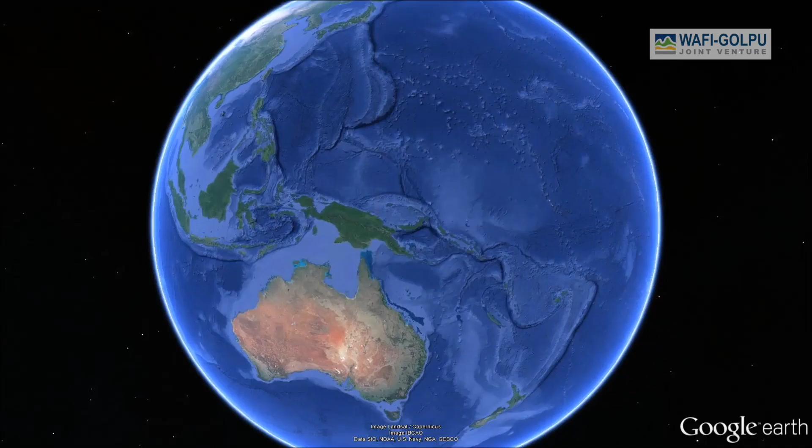The Wafi-Golpu Joint Venture, WGJV, an unincorporated 50-50 joint venture of subsidiaries of Newmont Corporation and Harmony Gold Mining Company Limited, is looking to progress the Wafi-Golpu project, the proposed development of a world-class underground copper gold mine in the Morobe province of Papua New Guinea. This fly-through shows the proposed mine and related facilities comprising the project.

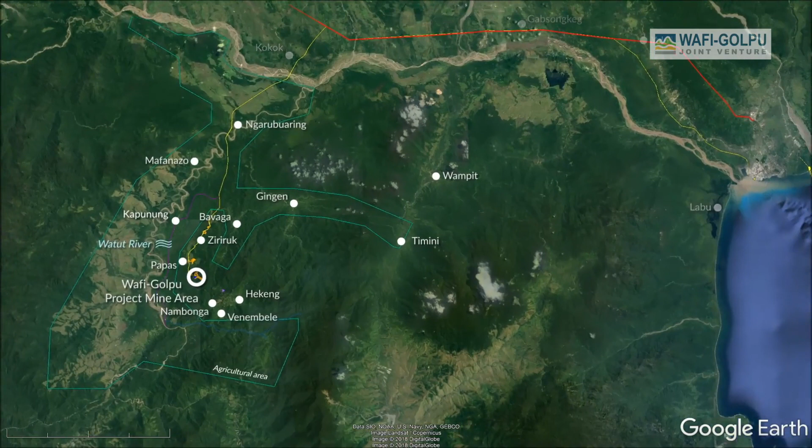The mine area is located approximately 65 kilometres southwest of the city of Lae, on the northern side of the Owen Stanley Ranges. The project footprint will extend from the mine area around Mount Golpu to the coastal area in Lae Port and Wagang, with an infrastructure corridor linking the two areas following the Watut and Markham valleys. The mine area, which is the subject of a special mining lease and ancillary tenement applications, will host underground access, ore processing, power generation, accommodation, and other ancillary facilities.

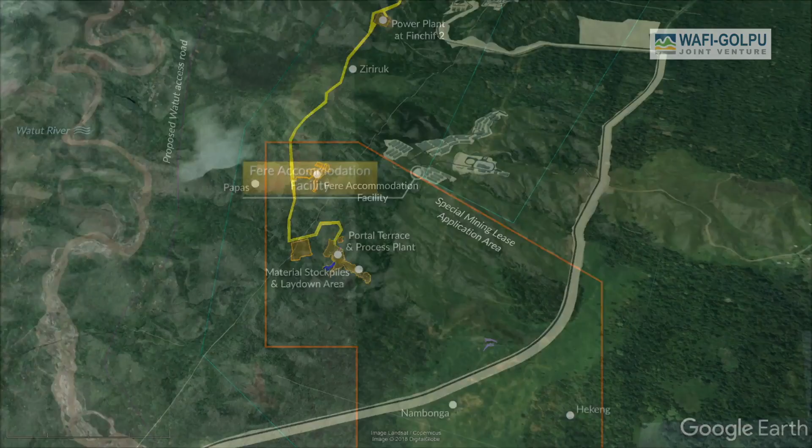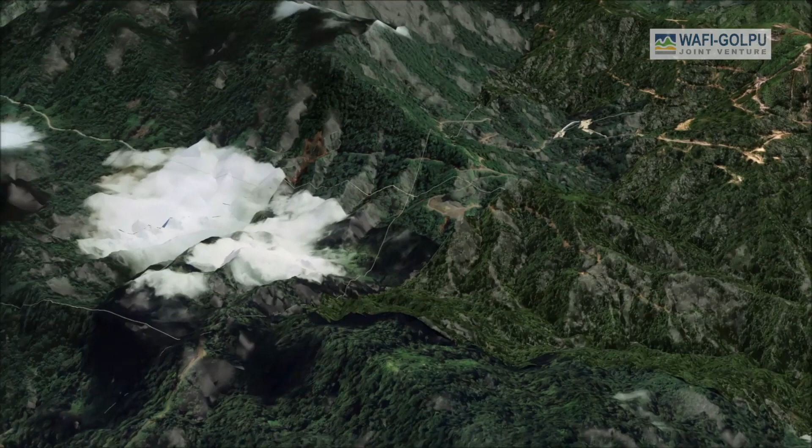Due to the mountainous terrain, some of these facilities, like the construction accommodation area, a potential power station and the laydown area, will be located in the lower Watut Valley. Other facilities must, by their nature, be located near to the ore body: the main underground mine access at the Watut Portal. The process plant and the Fere camp will all be located on the escarpment above the lower Watut Valley, at an elevation of 200 metres.

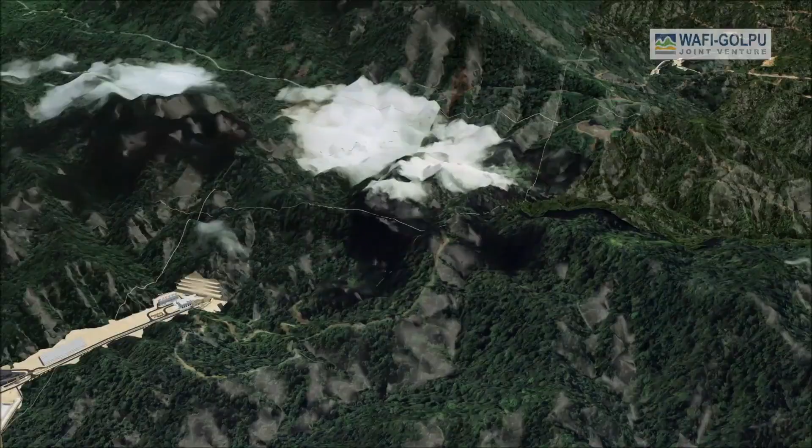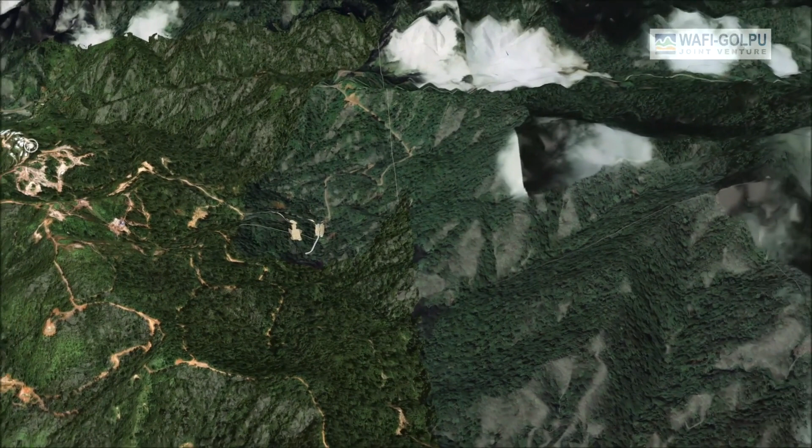A secondary underground access point, the Nambonga Decline, will be located closer to Mount Golpu. This access point will also serve as an important part of the mine ventilation system and will provide initial exploration access to establish an underground drilling platform to support further advanced geological and geotechnical data collection. It is proposed to utilise a mining method known as block cave mining. The main environmental benefit of this type of underground mining is a reduced environmental footprint compared to open-cut mining.

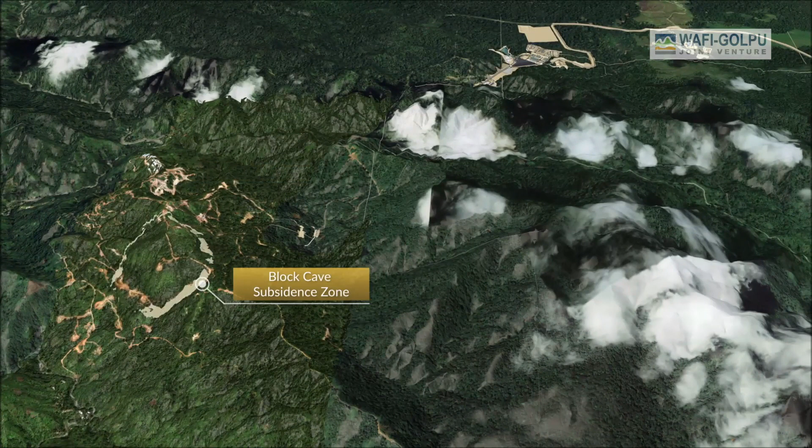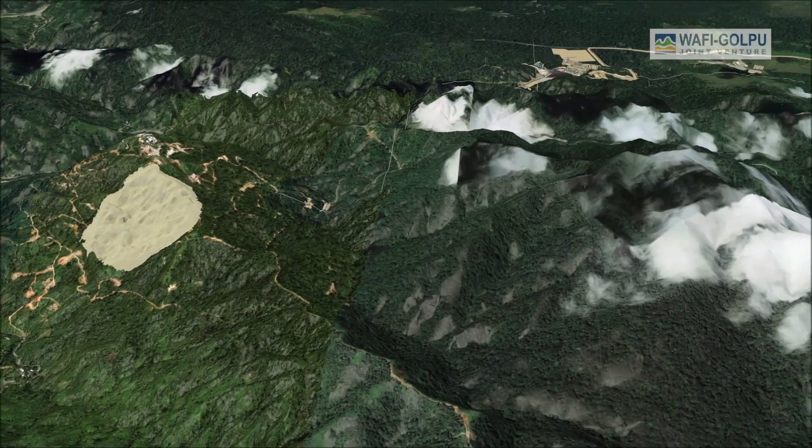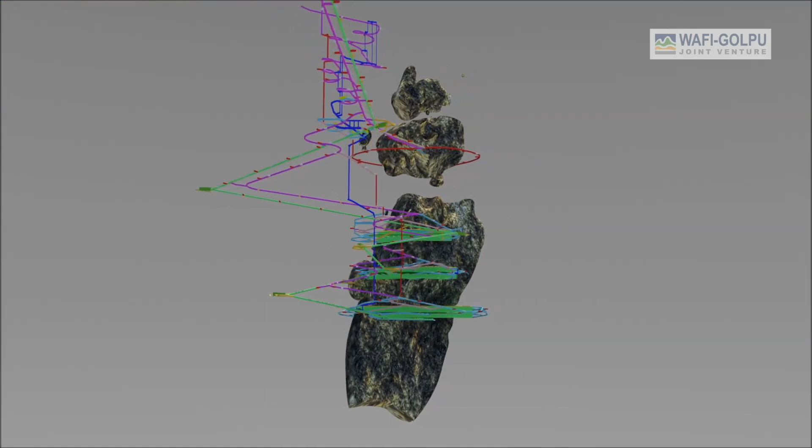The underground block cave mine lies below Mount Golpu, and a subsidence zone will develop as mining progresses and will break through to the surface about 3 years after ore production starts. The subsidence zone will expand gradually over the life of the mine to an estimated diameter of 1,000 metres. The Golpu copper-gold ore body is the dark near-vertical column-like mass that starts 200 metres below the surface and extends to depths of over 2,000 metres. The ore body is about 400 metres wide and well suited to the block cave mining technique. Offsets in the vertical profile of the ore body are caused by faulting.

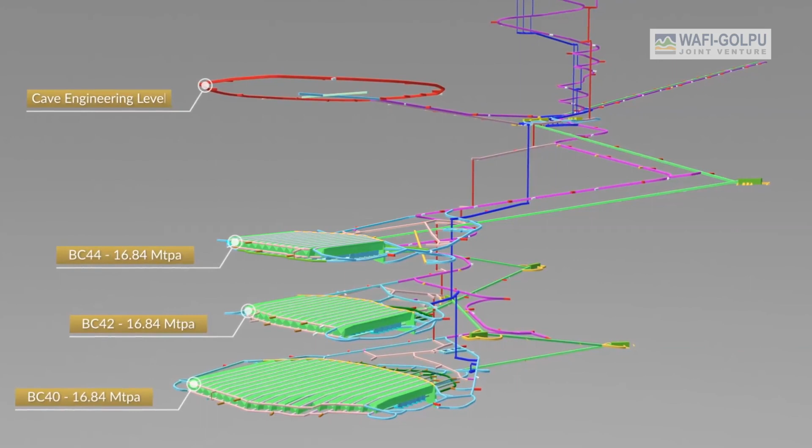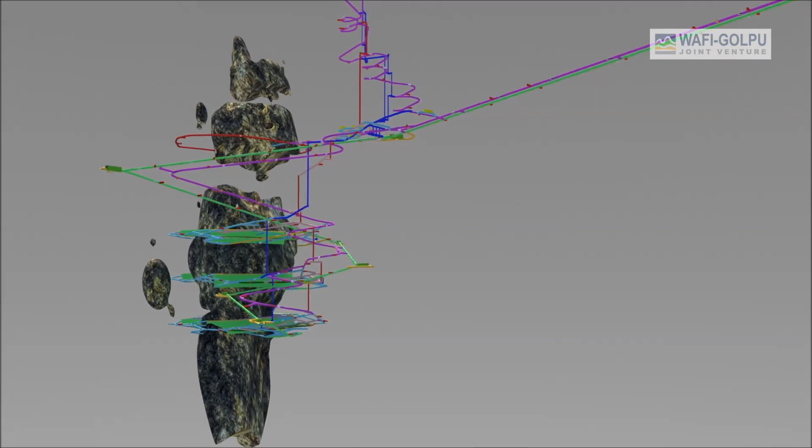The main access to the ore body will be via the Watut Decline, comprising twin tunnels, that extends 4.6 kilometres to reach the bottom of the first caving level, BC 44. As decline development or tunnelling advances only a few metres per day, it will still take 5 years before the first ore is produced. Over the life of the project, more than 100 kilometres of tunnels will be developed, which will make the proposed mine the largest underground mine in PNG and on a world-class scale. The secondary access, Nambonga Decline, is shown as a spiral formation.

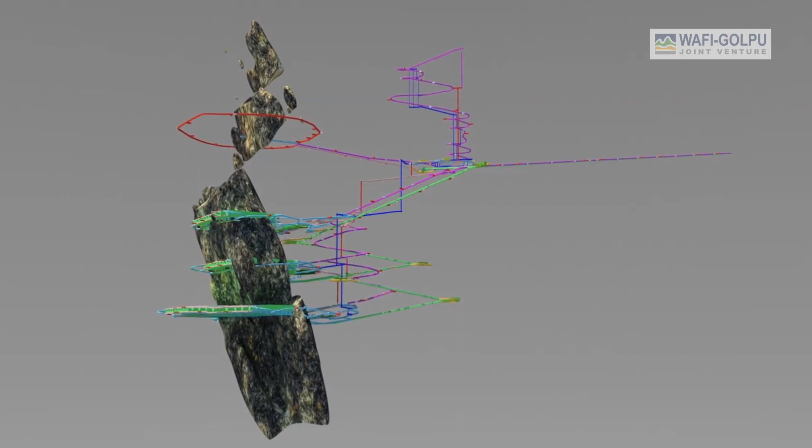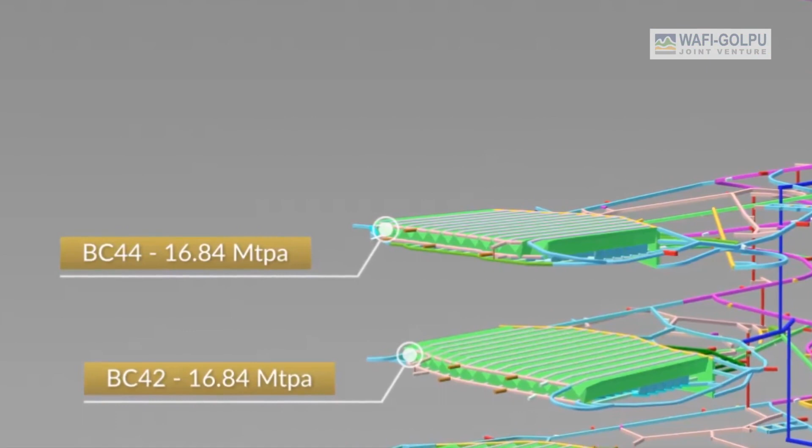The red ring above the main ore body is the cave engineering level that will be used to monitor the growth of the caved broken rock column. This will also be an important interception point for removal of underground water, a process called dewatering. Below this lie the 3 extraction levels, which are shown as solid green discs. The uppermost of these is called BC 44, which lies some 1.3 kilometres below the surface of Mount Golpu. This will be the first block cave mined, peaking at some 16.8 million tonnes per year and having a production life of some 7 years. Below this are 2 further block cave levels, called BC 42 and BC 40, each 200 metres apart. The period of mine production from all 3 block caves is estimated to be some 28 years.

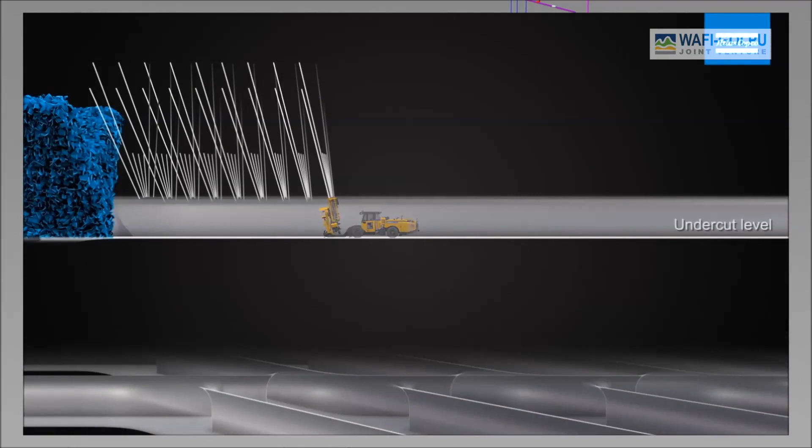We now look at how block caving works. The method involves the undermining of the ore body to make it collapse under its own weight, forming table-sized boulders. The rock is directed into a series of funnel-shaped excavations to enable extraction. Drilling and blasting is used to undermine the ore body to form what is called the undercut level. This is then connected to an extraction level via a series of funnel-shaped drawbells. The extraction level is strengthened by steel and concrete reinforcing.

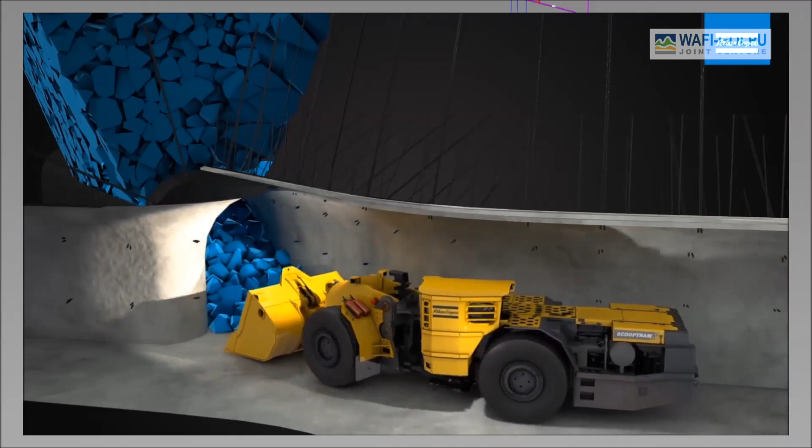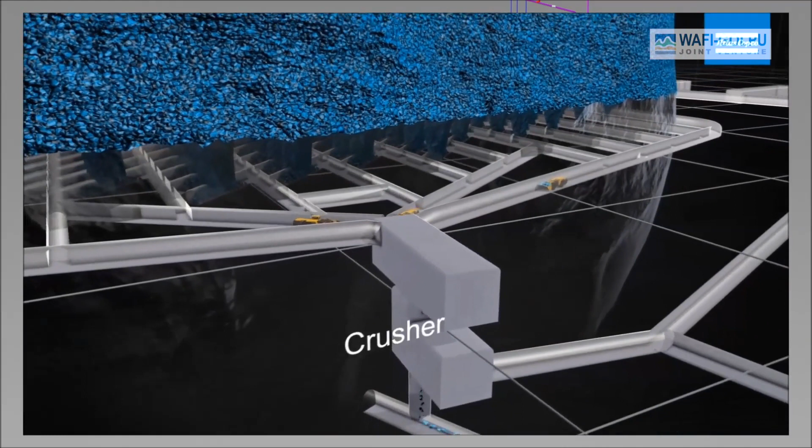Loaders, called LHDs, which stands for load haul dump, recover the broken ore, and take this to centralised underground crushers that reduce the rocks to a more manageable football size, suitable for transport to the surface. This transport is via a series of conveyor belts, which is shown as the green zigzag line extending from each of the levels. The conveyor goes through a series of transfer stations before travelling up the Watut decline to take the crushed rock to the surface, exiting at the portal.

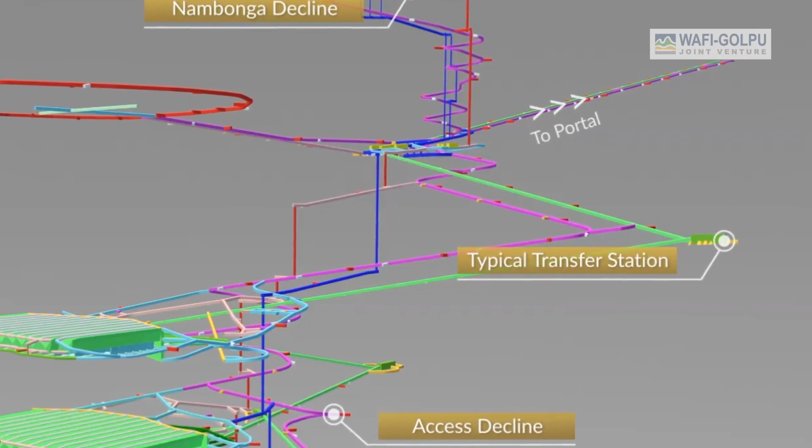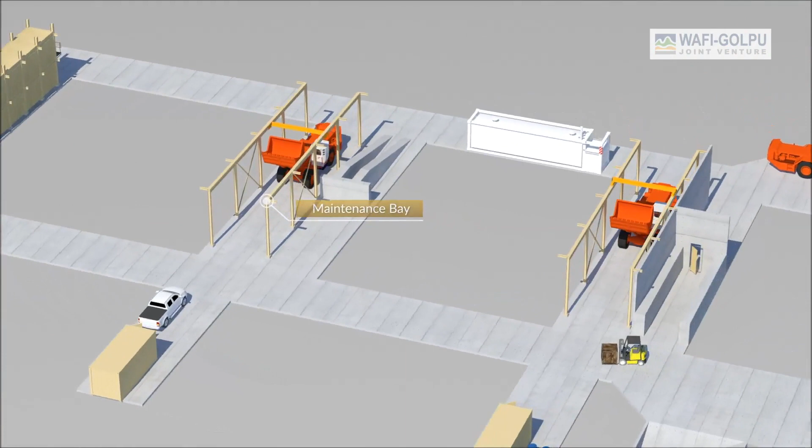The underground activities are fully supported by underground infrastructure, like the workshop, which allows all equipment to be cared for and maintained underground. That means that the mining fleet does not have to travel up and down to the surface every day. The crusher chamber contains a gyratory crusher, which crushes the rock between a gyrating steel core and the wall of the crusher.

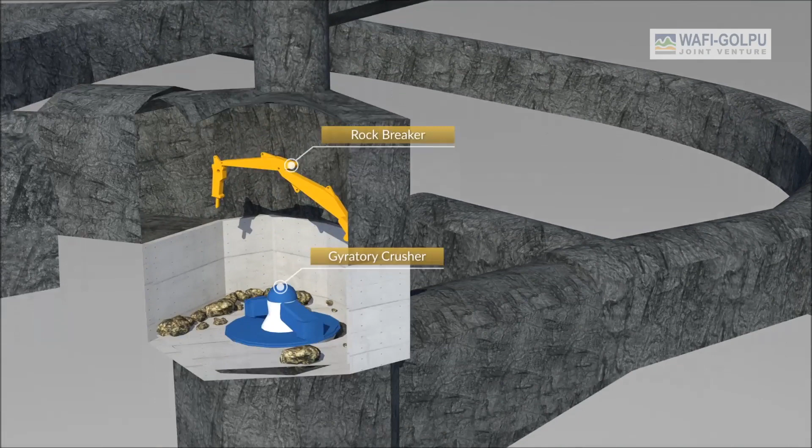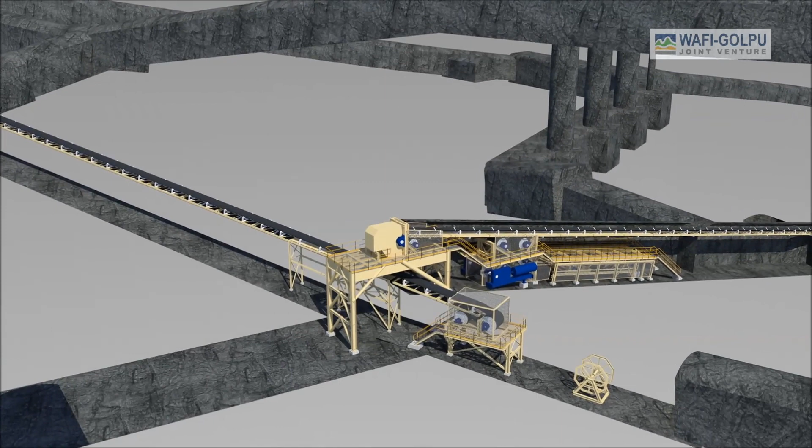The crushed rock collects at the bottom in the crushed ore bin, and then it is fed onto the conveyor belt. We now zoom in on the conveyor transfer station, which enables the change in direction for the conveyors at each level. Crushed ore on one conveyor drops down onto the one below via a chute, and then continues up the receiving conveyor.

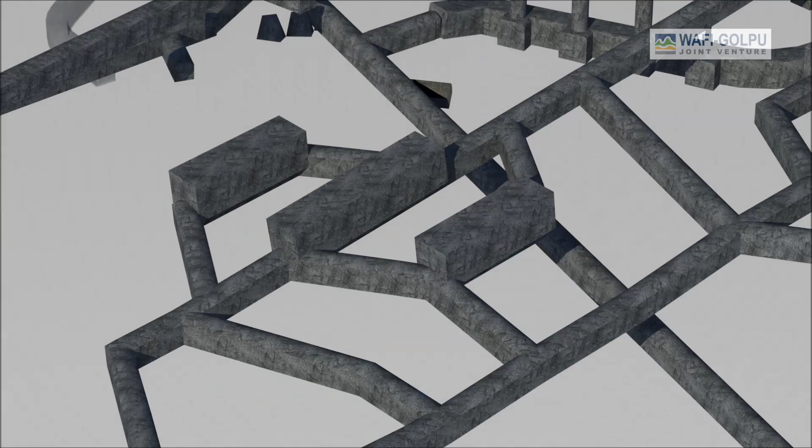Two other very important underground systems are the water pumping and cooling and ventilation systems that enable people to work safely deep underground, where it can be both hot and wet. These systems must operate 24 hours a day, 7 days a week, requiring a 99% reliable power supply to keep running and ensure a safe working environment.

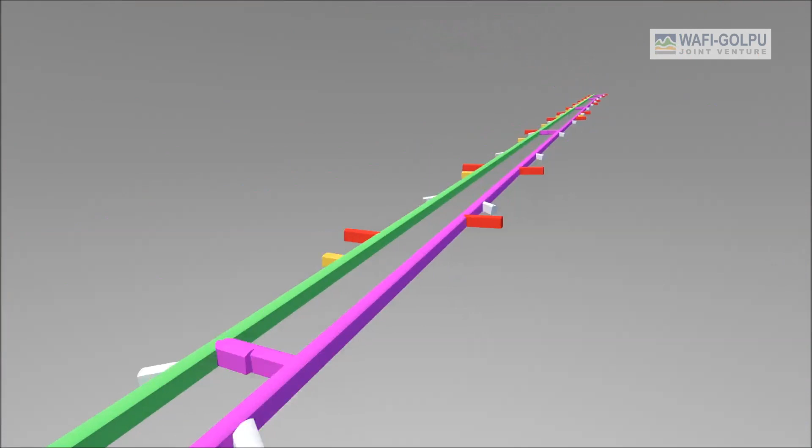Following the conveyors back up the Watut decline to the surface portal area, we see more of the critical underground ventilation system infrastructure, namely bulk air coolers, cooling towers, extraction fans, and refrigeration machines. The conveyor delivers the crushed ore to the cone-shaped pile called the coarse ore stockpile. This sits next to the layered startup ore stockpile, which is a temporary stockpile used to hold ore that is extracted during the initial construction of the decline and underground development.

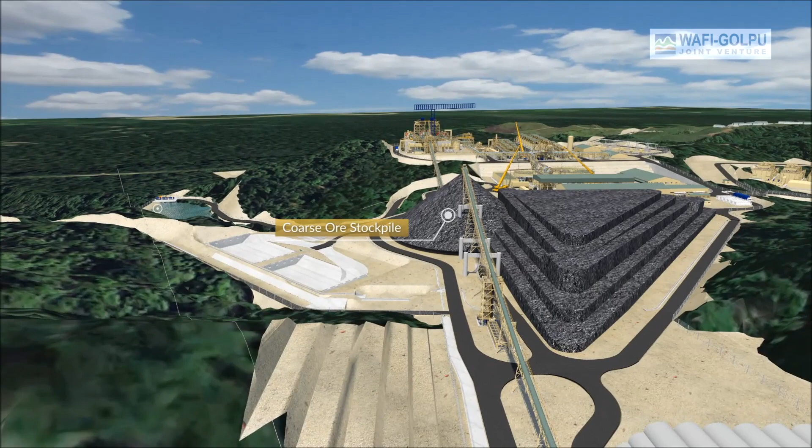To the left of the ore stockpiles are some important environmental controls for water management, namely the silt traps, raw water dam, and sedimentation pond. These facilities help to manage water and sediment from the process plant and portal terrace. During construction, treated mine water, including treated sewerage, will be reused for mine services where possible, and excess will be discharged to the lower Watut River or Nambonga Creek.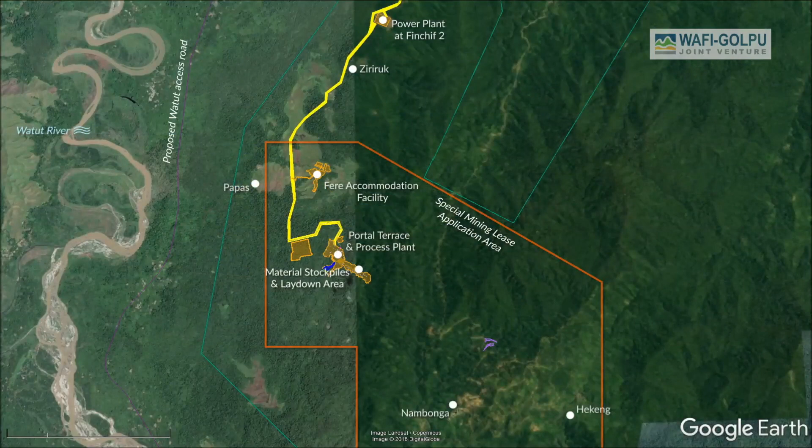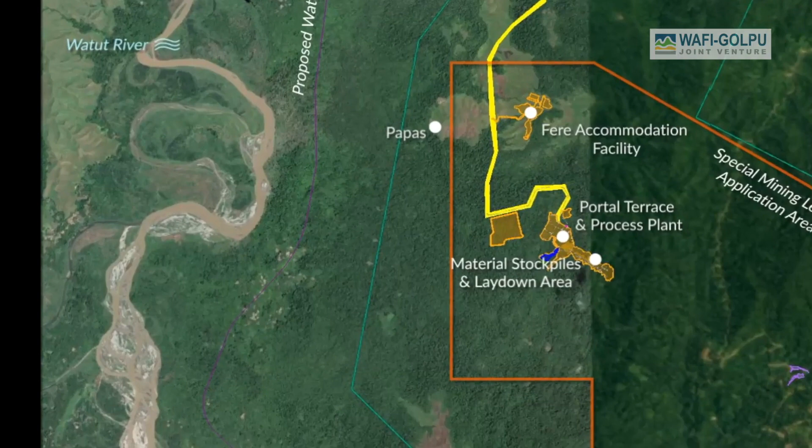During the operational phase, treated wastewater will generally be used in the process plant, with additional water needs met by the extraction of water from the lower Watut River. It is estimated that this extraction will be less than 1% of low-level flows.

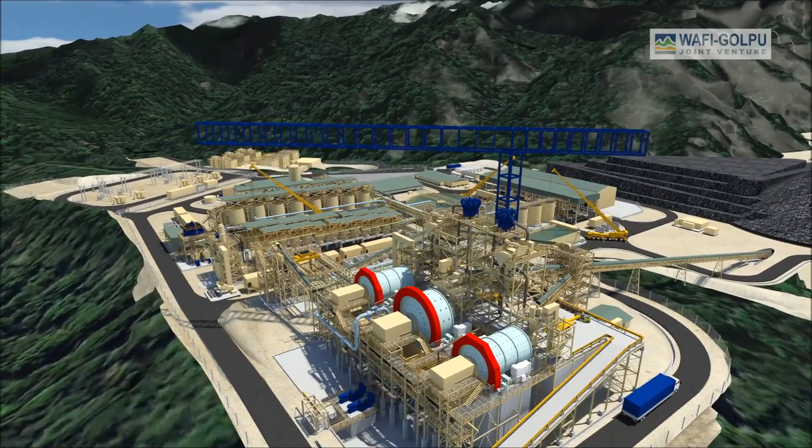We now move around the southwestern side of the process plant, where the primary and secondary grinding facilities are located. This consists of a central semi-autogenous grinding or SAG mill and a smaller ball mill on either side. These grind the ore into a fine powder, like flour, to make it easier to separate ore minerals from waste minerals, which later become the tailings.

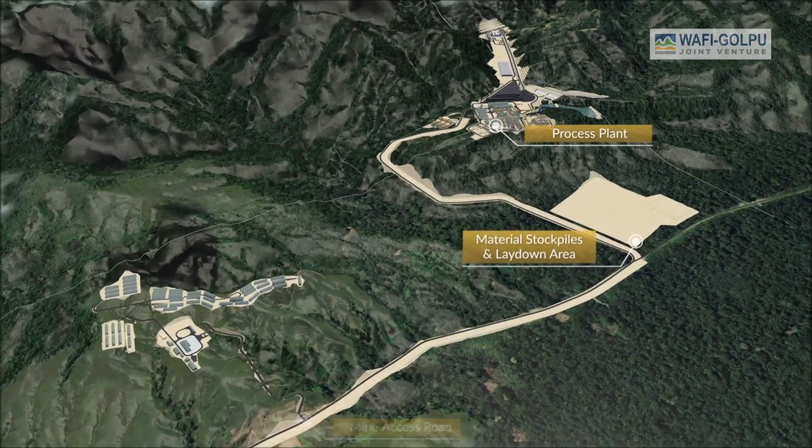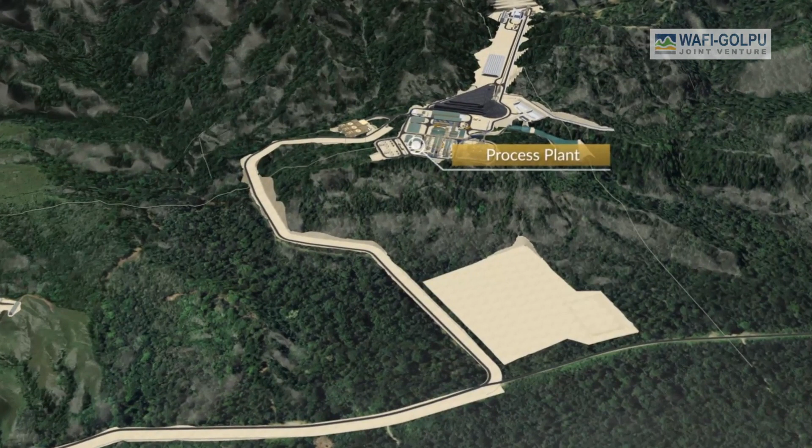An important feature of the proposed mine is that material extracted from the underground block cave after startup is processed in the process plant. That means apart from some small managed facilities during underground decline development, there will be no ongoing waste rock and no need to develop large waste rock dumps like at open pit mines.

The finely ground ore is mixed with water and some collector chemicals like detergent that form large bubbles inside flotation tanks called the pyrite and copper roughers. In these tanks, the valuable copper-rich minerals are physically separated by sticking to the bubbles and float to the surface where they are collected, whilst the non-valuable minerals sink to the bottom of the tanks and report to the tailings. Cyanide will not be used in any of the processing.

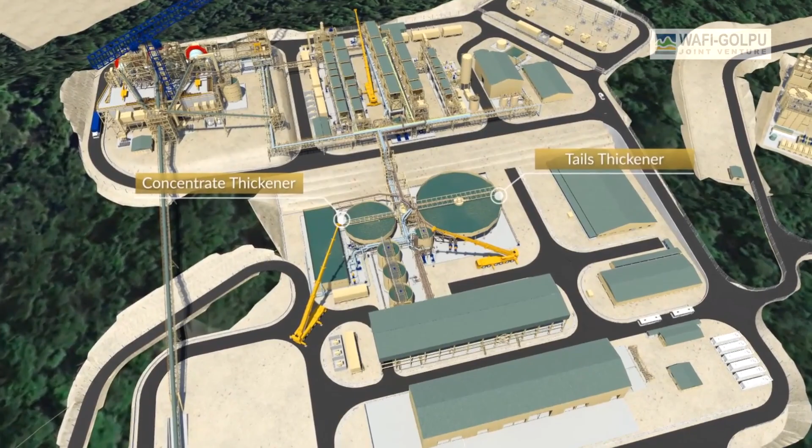The separated valuable ore minerals become the concentrate. The non-valuable minerals that sink to the bottom of the roughers form the tailings stream. The two streams flow into two large tanks in the centre of the process plant called the concentrate thickener and the tailings thickener. These tanks remove excess water so that the respective mixtures can be efficiently transported 100 kilometres to the coast by pumping in plastic-lined, thick-walled steel pipelines.

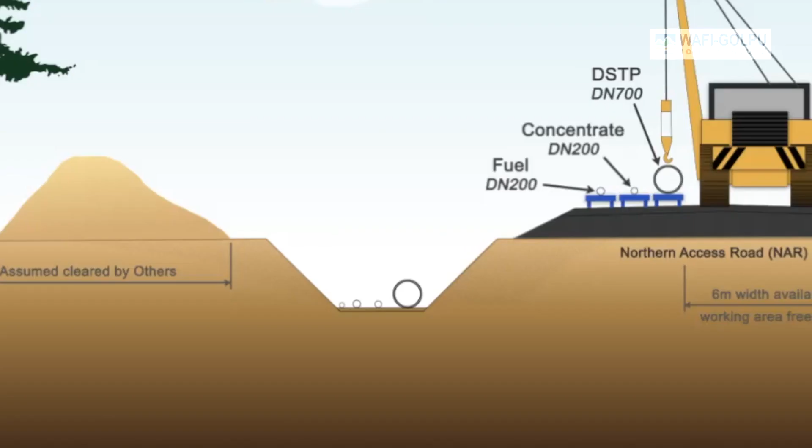We now look at the pipeline infrastructure corridor in more detail. The picture shows pipes during construction, before they're installed and buried. There will be 3 pipelines. The larger tailings pipeline, which is 700 millimetres in diameter, about the size of a 44-gallon drum, and 2 smaller 200 millimetre pipelines, one that conveys intermediate fuel oil to the power station, and the other that transports the concentrate to the port at Lae for export. All of the pipelines will be buried at least 1.2 metres below ground.

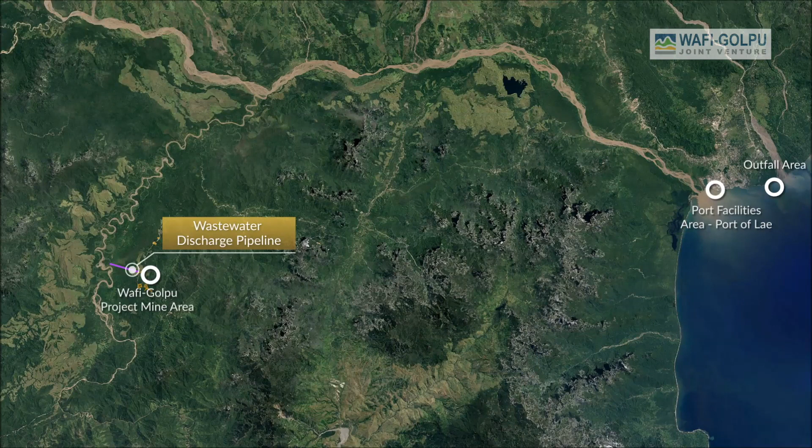Looking at the pipeline infrastructure corridors, the short purple-coloured route shows the discharge pipeline location for treated mine water, which we intend using during the initial construction phase until mine wastewater is redirected to the operational process plant. The yellow route shows the pipeline infrastructure corridor, which is aligned with the proposed Northern Access Road that will link the Highlands Highway to the mine area.

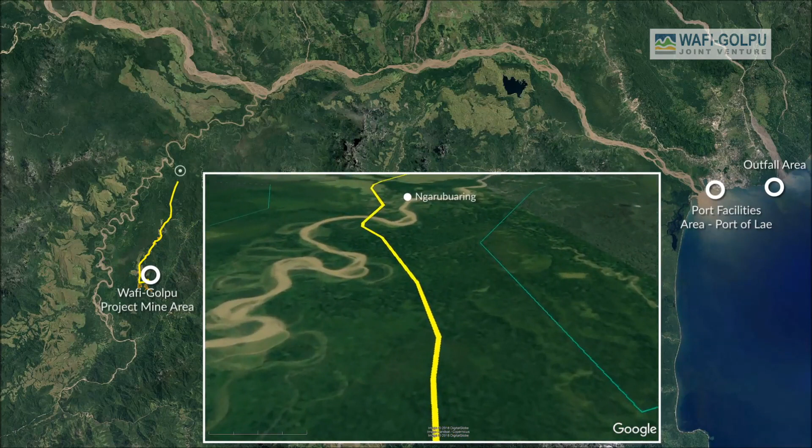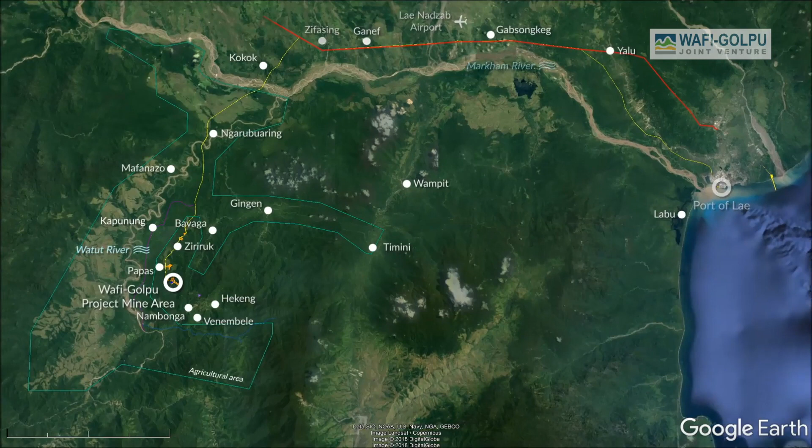The Northern Access Road, in combination with the current access road between Damakwa and Bavaga and planned community roads going around the south of the mine area, will create an important economic corridor, estimated to open up and provide access to large areas of land for a variety of potential agribusiness activities, as well as providing improved access to produce markets and a range of social services for local communities along the Lower Watut Valley.

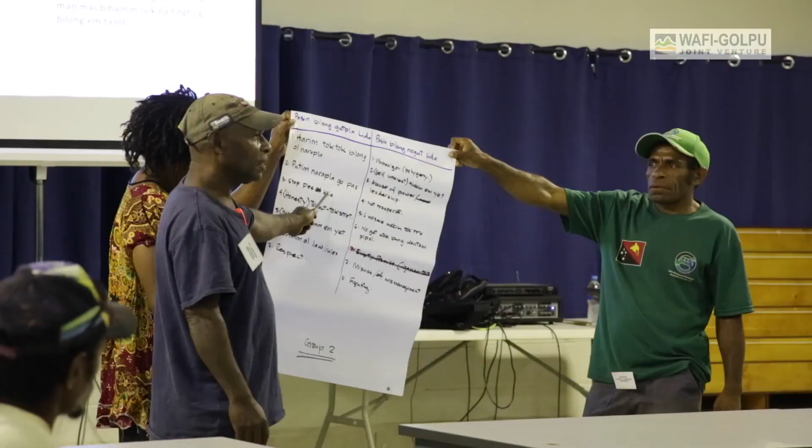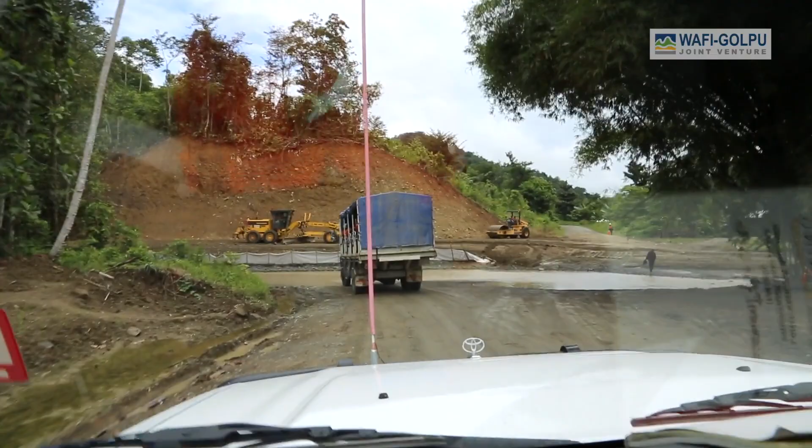Since 2010, WGJV has worked with farmers from Lower Watut and other partners to create a vibrant cocoa industry. This program has provided for the development of nurseries for high-yielding cocoa varieties for distribution to farmers, crop husbandry training, cocoa bean fermenting and drying training, quality control training, and marketing assistance. The development of new transport infrastructure will allow for further growth of agricultural enterprises in the project area, which would benefit communities and the region.

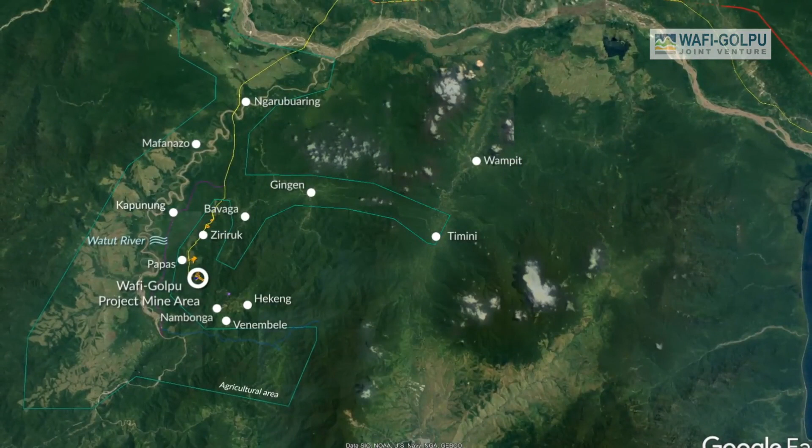A range of agricultural products including coffee, rice, cassava, biomass, poultry, palm oil and beef cattle are being explored by WGJV and agribusiness partners aligned with Morobe Province's Kundu Vision 2048 and PNG's National Development Plan.

The Northern Access Road will include 2 large bridges, a 200-metre bridge over the Watut River and a 450-metre bridge over the Markham River. From near Zifasing, the infrastructure corridor will follow the PNG Power high-voltage transmission line corridor before travelling parallel with the Highlands Highway into Lae.

Special care has been taken with the route selection to follow previously disturbed areas and minimise potential environmental, social and cultural heritage impacts. In general, existing farming practices will only be disturbed during the actual pipeline construction window and may resume on the edges of the pipeline corridor once the pipeline trench has been backfilled.

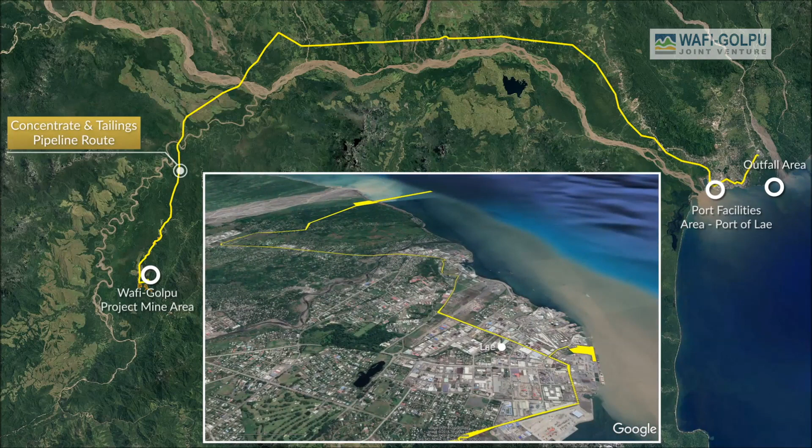All of the pipelines are designed with special protection against corrosion and have internal pipeline cleaning and inspection systems. Importantly, they also have leak detection systems. In Lae, the concentrate and fuel pipelines terminate in the port area, while the tailings pipeline continues to the outfall area to the east of Wagang.

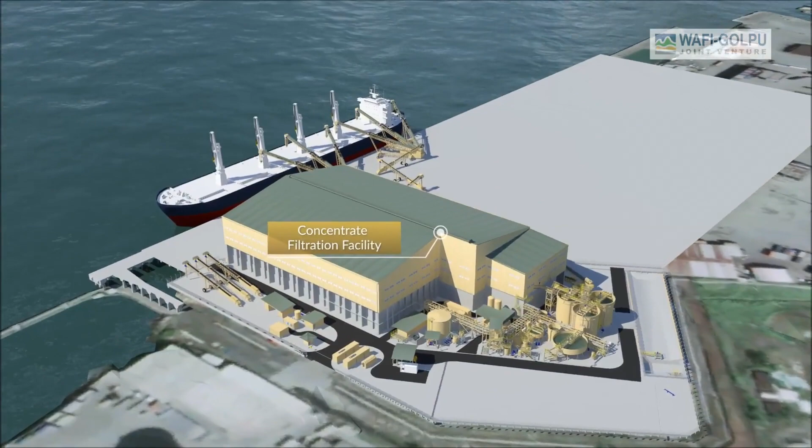At the port, a concentrate filtration facility will be built. It will contain large filter presses that squeeze the water out of the concentrate to form a damp cake that is stored inside the fully enclosed storage facility ready for export. The filtrate water is treated to meet water quality requirements prior to discharge offshore.

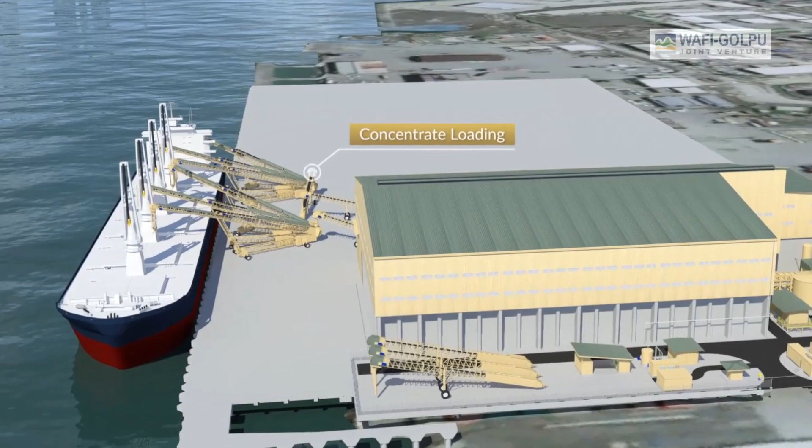Concentrate will be loaded on a cargo ship using a covered mobile conveyor system. The ships then transport the concentrate to smelters around the world for copper and gold recovery. We now move across to the outfall area to the east of Wagang. Here the tailings pipeline enters the choke station.

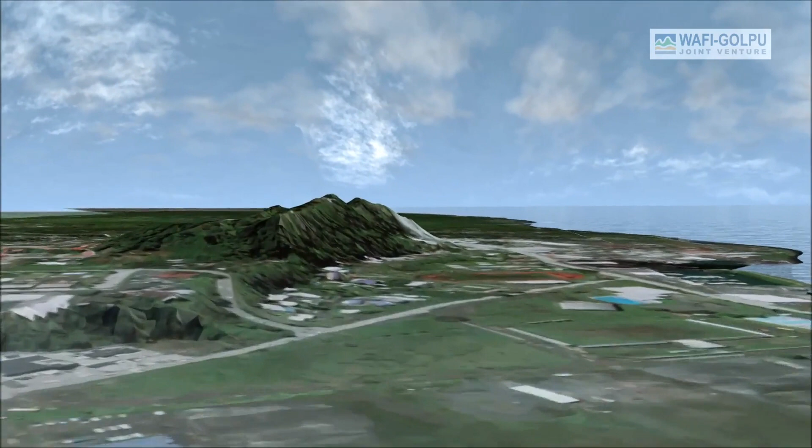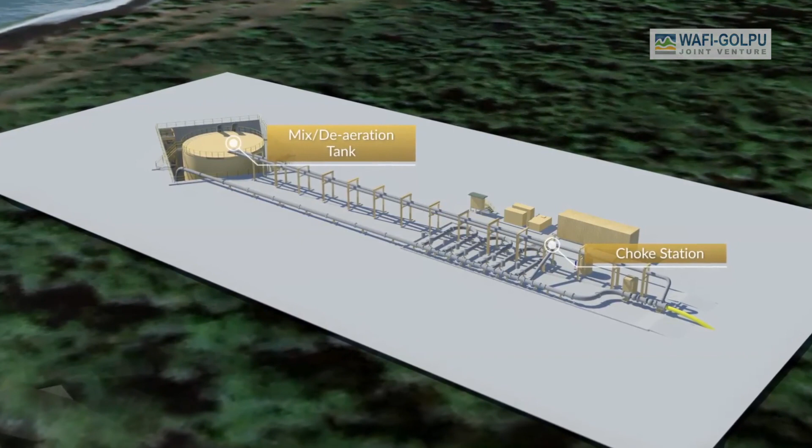Its purpose is to reduce the pressure inside the pipeline prior to the tailings being discharged into the mixing and de-aeration tank. In this tank, we introduce 4 parts seawater to 1 part tailings mixture to increase the density of the tailings, because the tailings only contain fresh water at this point. The tank also allows any trapped bubbles of air in the tailings to be removed. Both of these things help the tailings to stay together and flow along the bottom of the seabed after discharge.

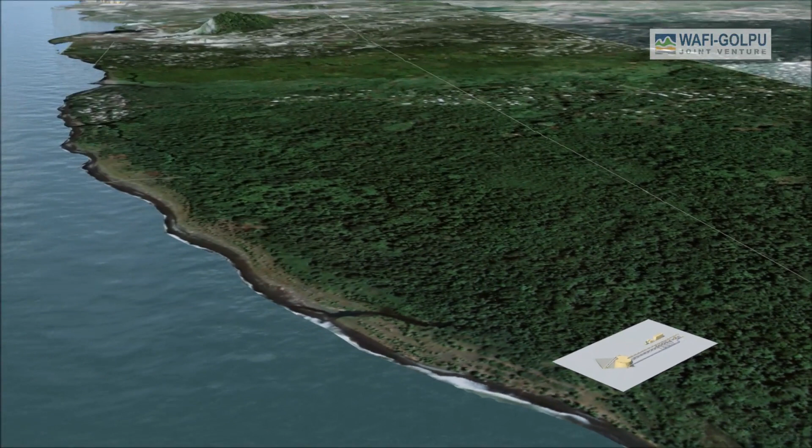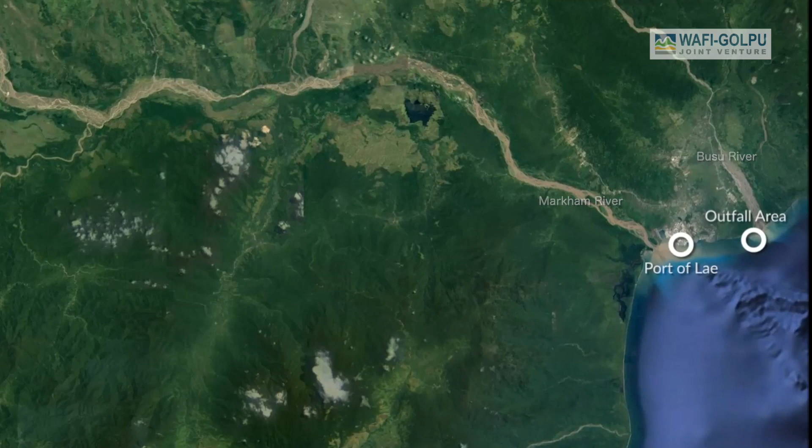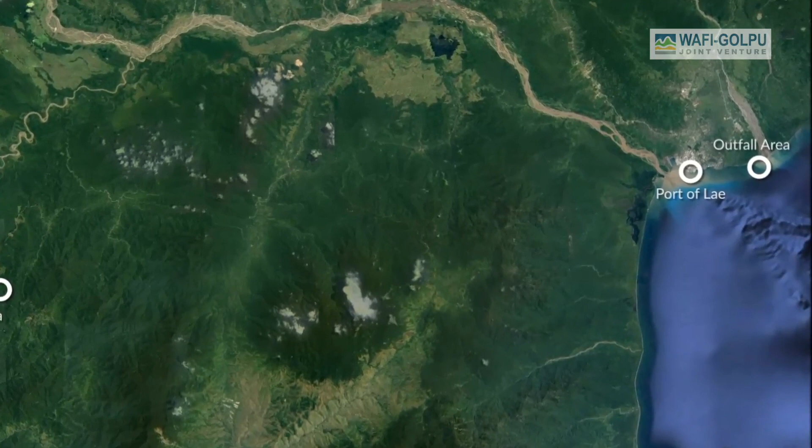This shows the location of the outfall system. An important consideration for the suitability of the proposed deep-sea tailings placement system is the existence of 2 major river systems, the Markham and the Busu. Studies estimate that these and other rivers along the northern shore of the Huon Gulf deposit in the order of 60 million tonnes per annum of floating, suspended sediment into the Huon Gulf each year, with additional sediment pushed along the bottom of these rivers into the Gulf.

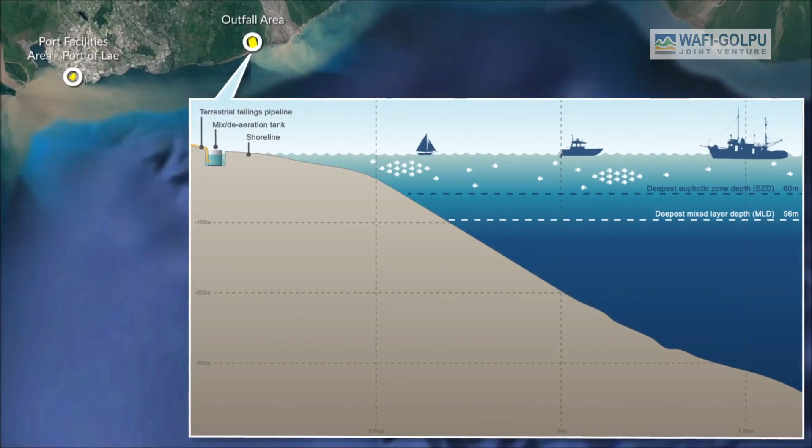By comparison, the proposed discharge of tailings from the mine will on average be less than 1/4 of the existing natural sediment being deposited into the Gulf. The pop-up insert shows a cross-section of the tailings outfall system. In the left-hand upper corner, you can see the mixing and de-aeration tank. This is connected to twin 500-metre-long seawater intake pipelines that are shown in green and are used to collect seawater from a depth of 60 metres for mixing.

The twin tailings discharge pipelines are shown in red and are 1,000 metres in length to enable tailings to be conveyed to the outfall location, which will be situated at a depth of approximately 200 metres at the edge of the subsea Markham Canyon. It is important that the discharge depth is well below the euphotic zone depth, which is the maximum depth that 1% of light can penetrate, effectively the limit that allows photosynthesis and biological production to occur. This is shown as the blue dashed line at 60 metres depth in the diagram.

The second white dashed line, shown at 96 metres depth, is the deepest level of surface water mixing caused by wind and wave action that has been detected in over 12 months of monitoring. The Wafi-Golpu Joint Venture has utilised a 2x safety factor in the placement of the outfall at a depth of approximately 200 metres, which is well below the mixed layer. This is a very conservative approach so that tailings will not affect biologically productive surface waters, the coastal environment, and the communities that use them.

At the outfall location, the tailings flow along the seabed and down the 20-degree average slope canyon wall, leading to the gently sloping bed of the Markham Canyon, where they mix with a persistent near-bottom suspension of natural river sediments coming from the Markham River. These further mix with other river sediments, including that transported by underwater landslide events, and deposit at depths over 1,000 metres. At mine closure, this same natural sedimentation will bury the mixed tailings and sediment deposits.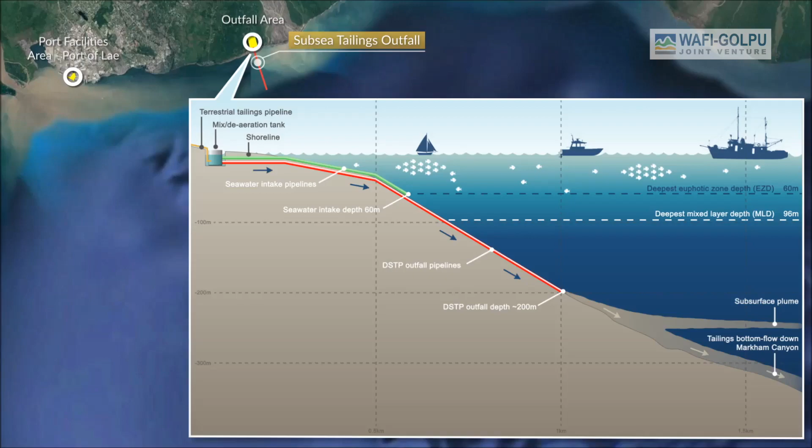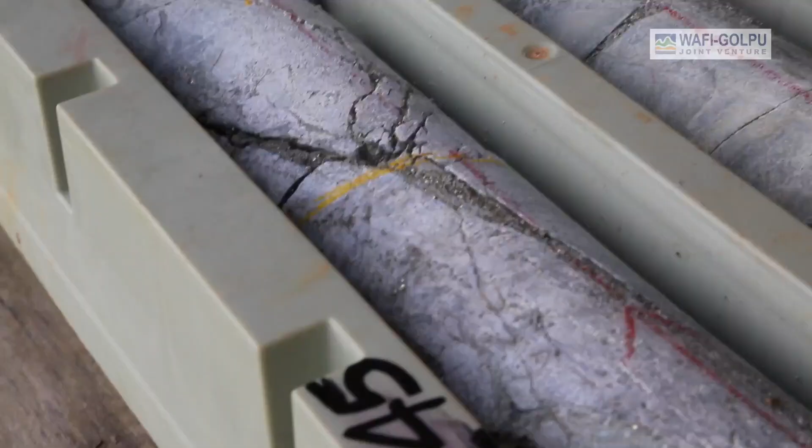We hope that you have found this informative and helpful to your understanding of the Wafi-Golpu project. It is a very exciting prospect for the future of the Morobe province and for Papua New Guinea, and the Wafi-Golpu Joint Venture looks forward to advancing its permitting and development with the cooperation and support of all of the communities affected by it. Thank you for listening.